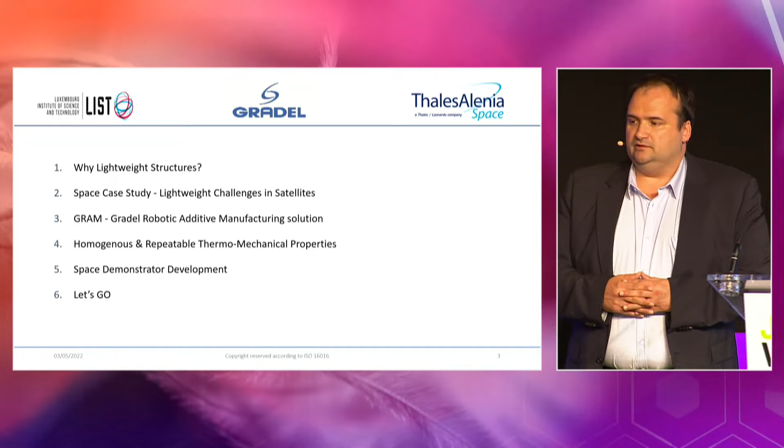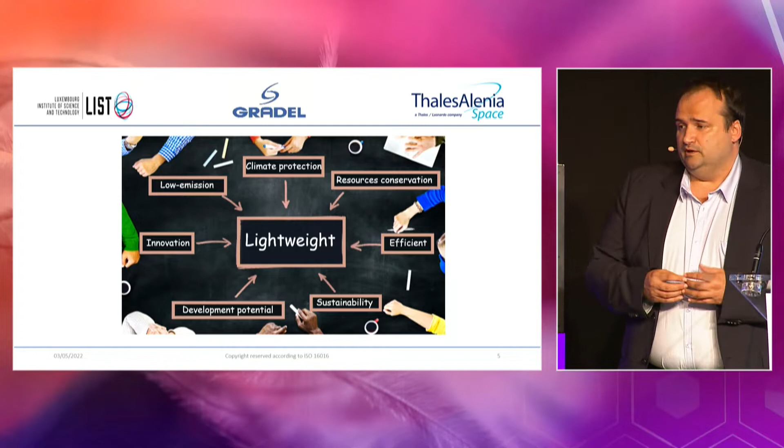Okay, why lightweight structures? In our opinion, we have a big consumption on Earth of natural resources. And if we make our structures lightweight and we use additive manufacturing, we can reduce our footprint, we can reduce our use of material and resources, and we make everything more efficient. And we think this is also the solution to reduce our use of resources.

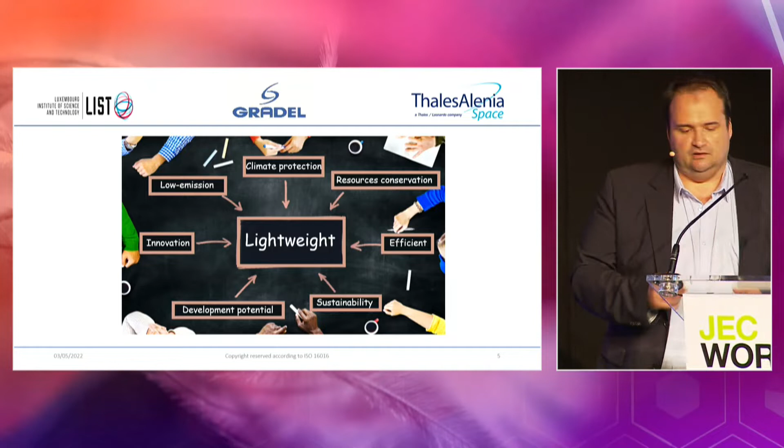I'll let my colleague speak. You hear me? Yes.

So I will just speak to you about the specification of space requirements, because the objective is to qualify this kind of part for space. So just a small word about my company, Thales Alenia Space, which is a main provider of satellite systems from ground to low Earth orbit to geostationary Earth orbit, which is the most important market for us, and up to exploration to the Moon, mainly via the Artemis program, and to Mars exploration.

So, as far as we want to qualify for space, we have to define what is specific to the space environment. This is a very harsh environment, which can be declined in extreme temperature, very cold and very hot, depending on whether the part is exposed to the sun or not. Thermal cycling, because during the Earth orbit, it can go from the sun side to the shadow side, which leads to cold and hot temperatures every time during the life of the satellite. Outgassing is a problem that we have to face, not only for the material, but for the redeposition on other parts of the satellite.

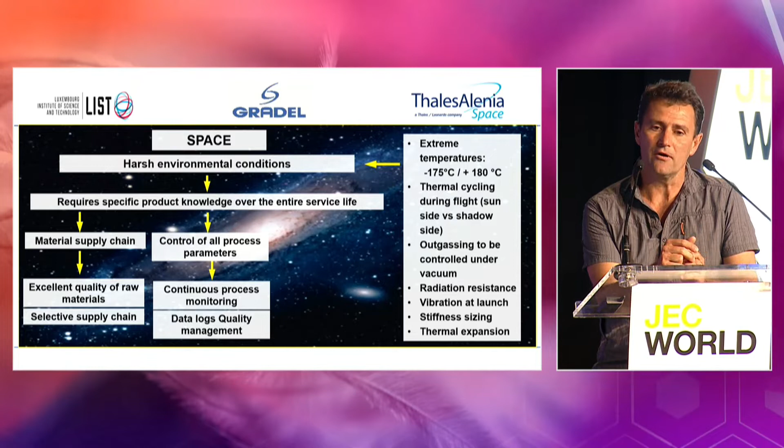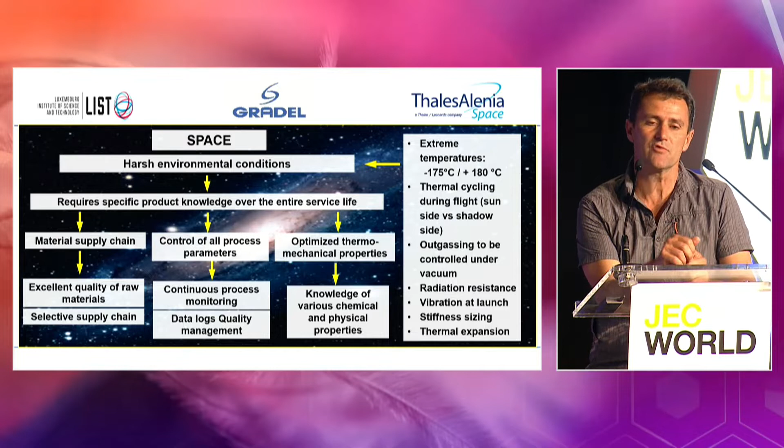It implies as well controlling all the process parameters, which induces a very restrictive qualification method, and it passes through continuous process monitoring and the storage of quality control data. And at the end, for technical parts, we are obliged to work with optimized thermomechanical properties in our materials, and thus we have to work with a high quality database, huge in terms of elements.

So just to come back to the problem of mass, why it is so important in space. I imagine you've got the answer. This is due to the launch, because in orbit there's no load, or almost no load. So most of the work of a mechanical engineer consists in working on the, let's say, 8 to 10 minutes of launch of the satellite.

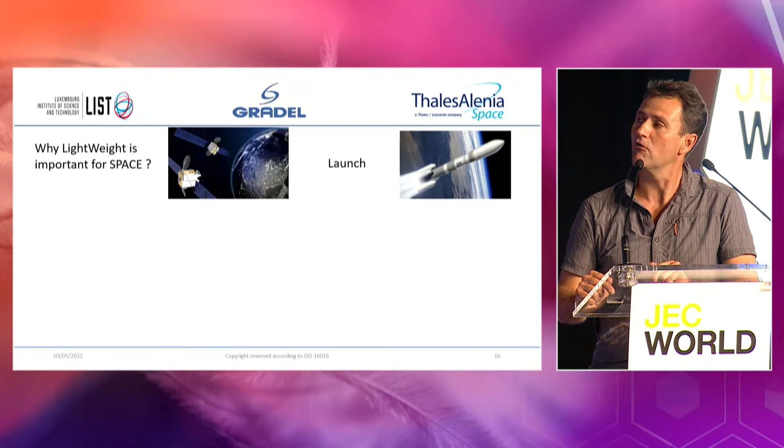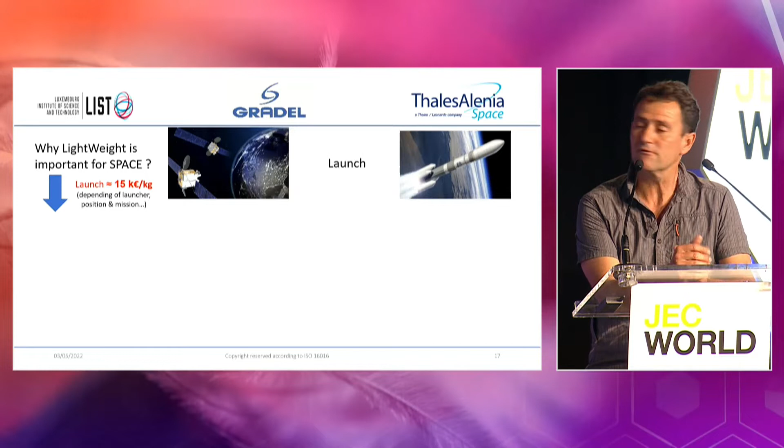When we want to quantify the implication of such a mass during launch, we are used to applying a ratio of 15 kilo-euros per kilo. It depends on the launcher, on the position of the satellite on the launcher, and the mission itself. You can imagine that when you've got a satellite with many tons, it implies a lot of money. That's why we are always working on mass saving in satellite design. This is not the only thing, because now that launcher capacities have increased, it is possible to optimize the cost.

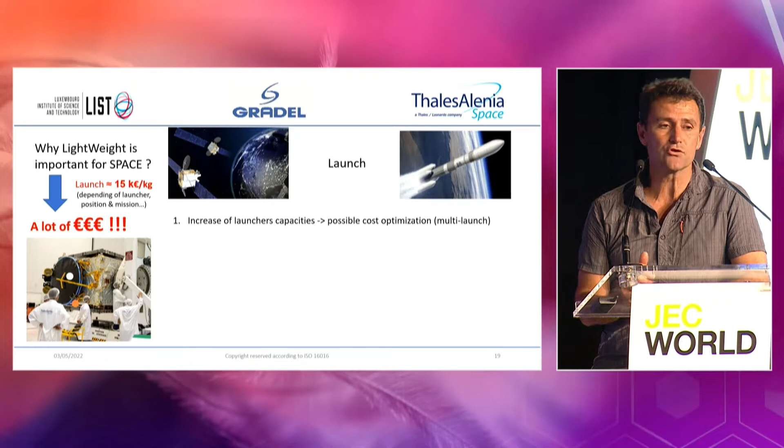Indeed, when you've got a mass saving, you can launch many satellites in only one launch, for example, when the launcher is able to. The other point is what we call snowball effects: mass generates mass.

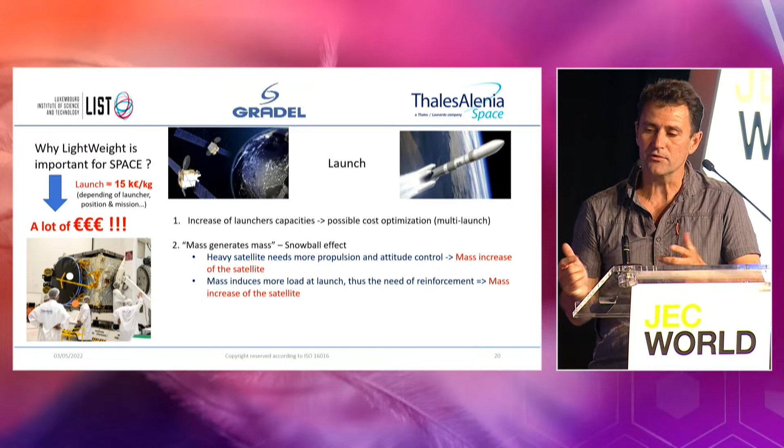Because you can imagine that a heavier satellite needs more propulsion and more systems to control attitude, so that it increases mass. In the same way, the mass induces more load at launch because of the weight, so the structure needs more reinforcement. So that's a very bad loop, because the mass induces mass.

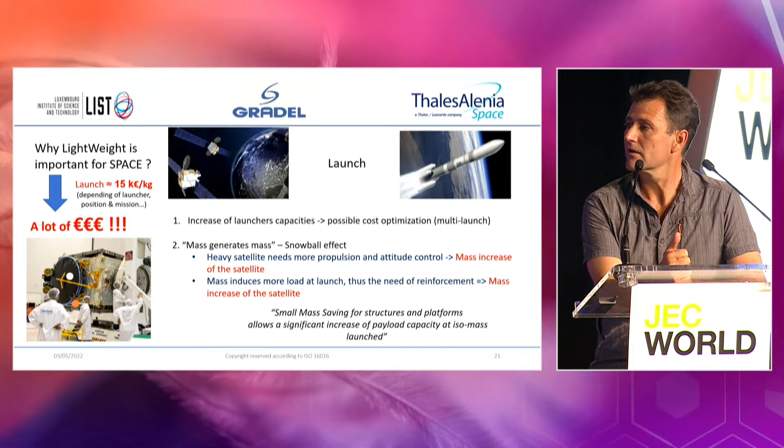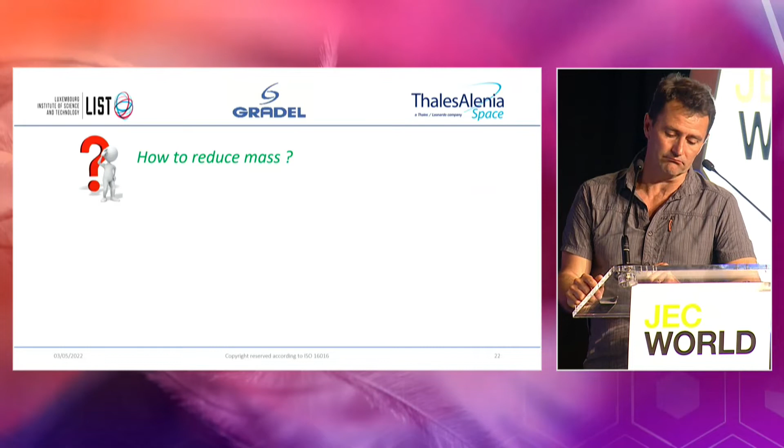To synthesize, a small mass saving for structures and platform allows a significant increase of payload capacity, obviously at iso-mass launched. So now that we have taken a picture of the mass problem, how to reduce this? Most of you know that one way is to optimize the structure.

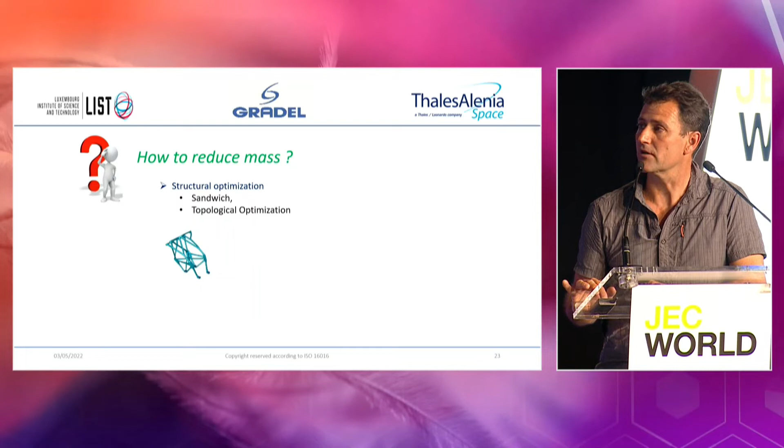That's the case for the sandwich design, for example, where the core is very light, keeping the flexural stiffness. Or the topological optimization for metallic parts, for example. That is the case in many parts. The other way is to optimize the material properties. Often we choose materials with high specific stiffness, and carbon is one of these examples, with CFRP, to reduce this mass.

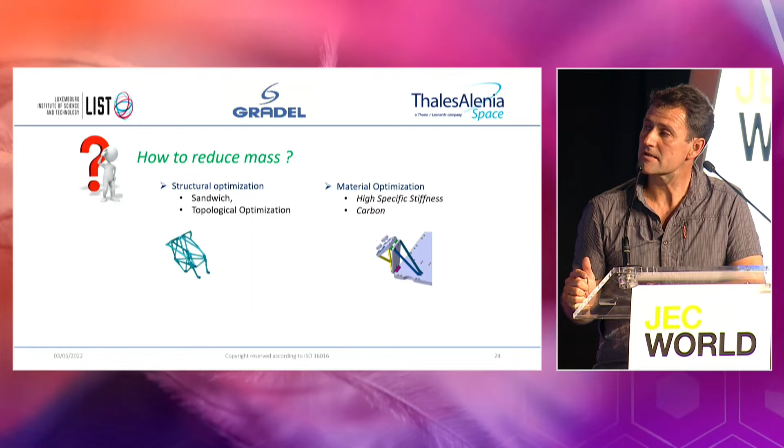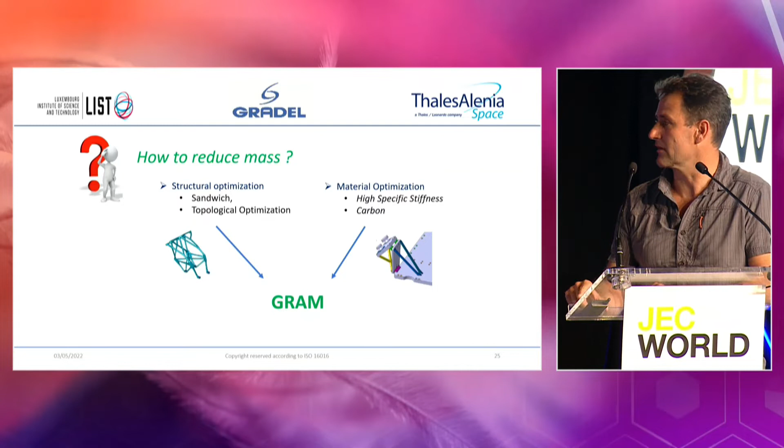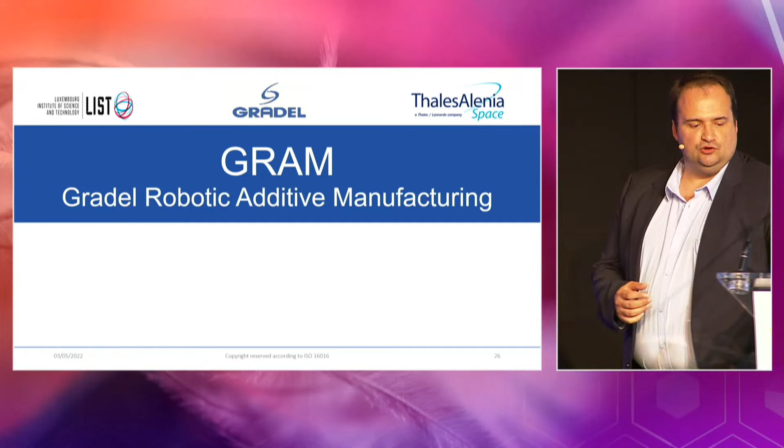We have these two solutions, and now I will let David present his solution, which is GRAM, a common solution between structural optimization and material optimization. You will see it's very promising. Yes. Thank you, Gilles. GRAM is Gradel Robotic Additive Manufacturing, which we developed in-house. And I will present you the advantages and disadvantages of such a machine.

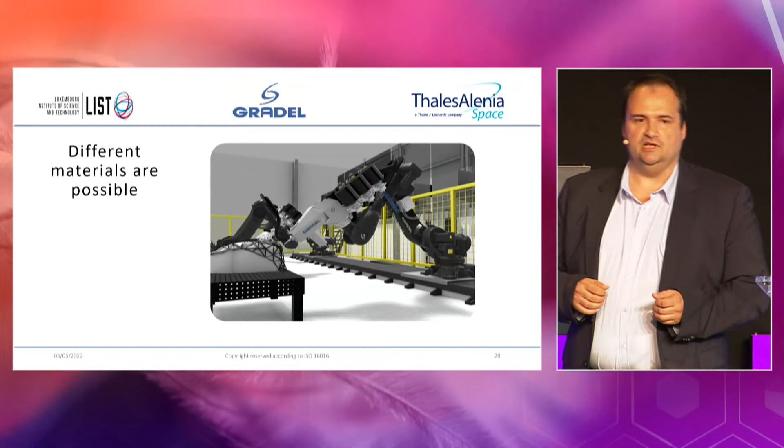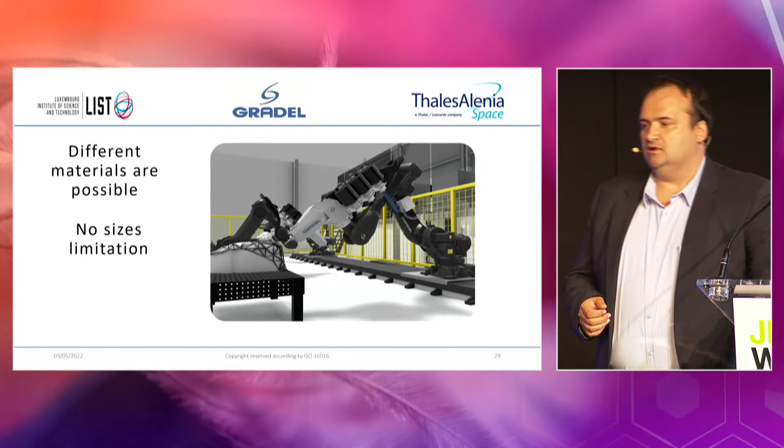It is mainly a robot, with the impregnation head, and the way of winding the filaments and the impregnation is everything in the head of the robot. We use industrial robots, and this gives us the advantage that we can use different materials. We have no size limit. For us, it's more difficult to make small parts than bigger parts, and we can make complex, high-resistant shapes.

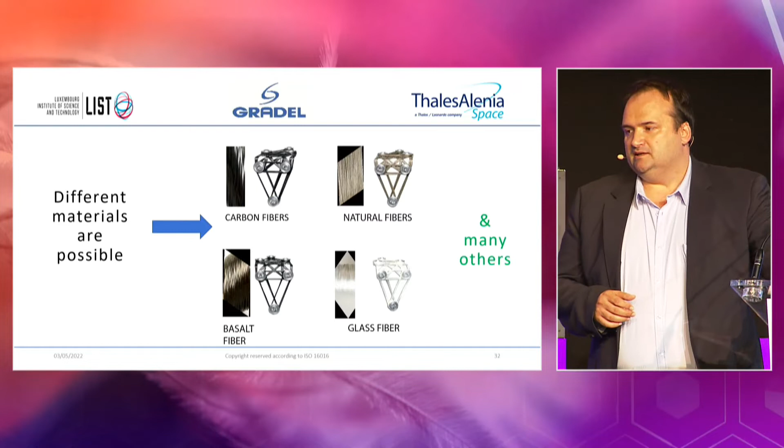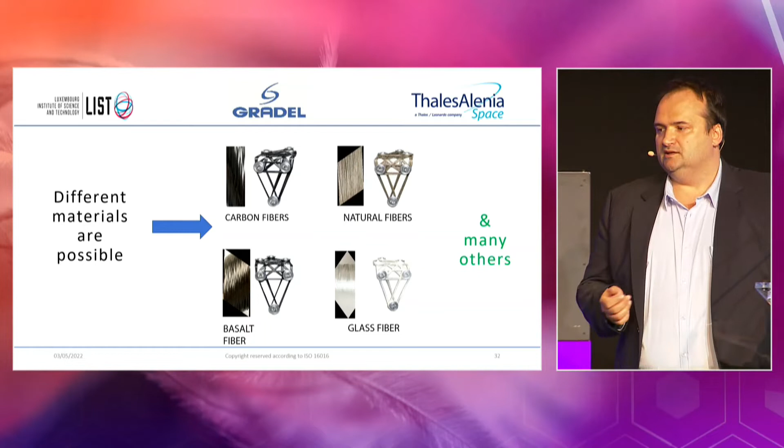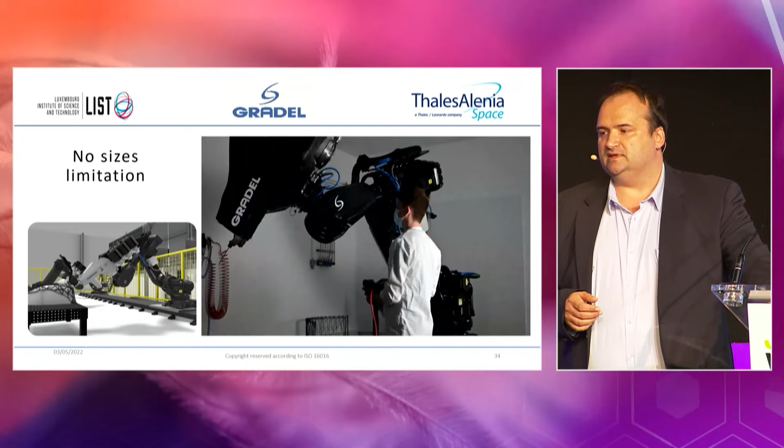Concerning the materials, we already tested carbon fibers, natural fibers, basalt fibers, glass fibers, and we can test many other fibers and resins. It means that if today you have resins and fibers, we can calibrate your material to be used in GRADEL. Here is a small picture of the GRADEL winding, and as I was saying, no size limitation. It will be more the limitation of your facility and of your oven if you need to cure your resins.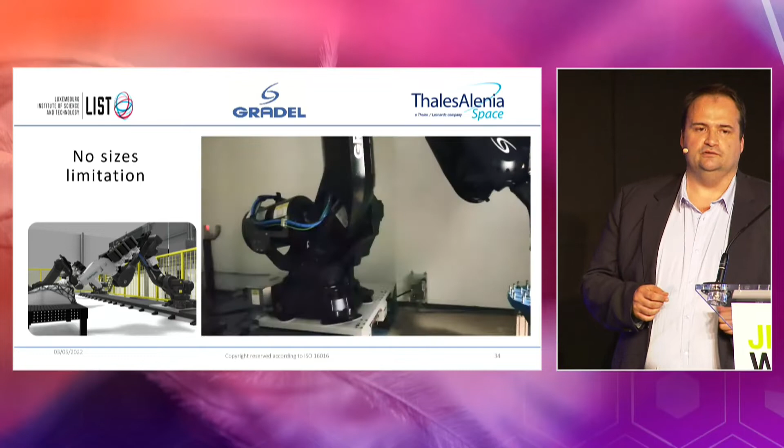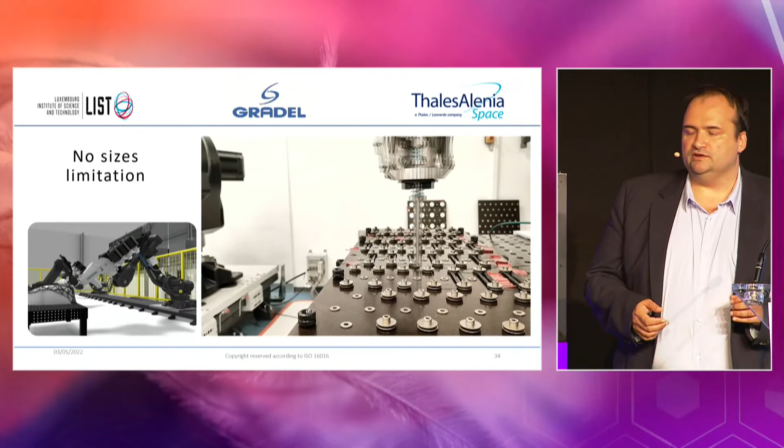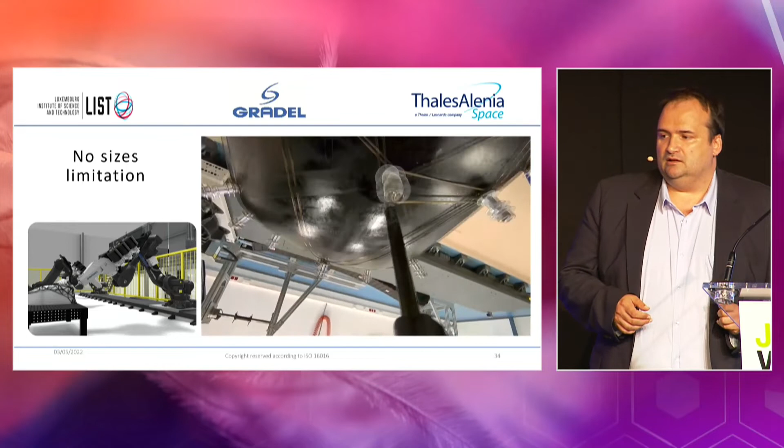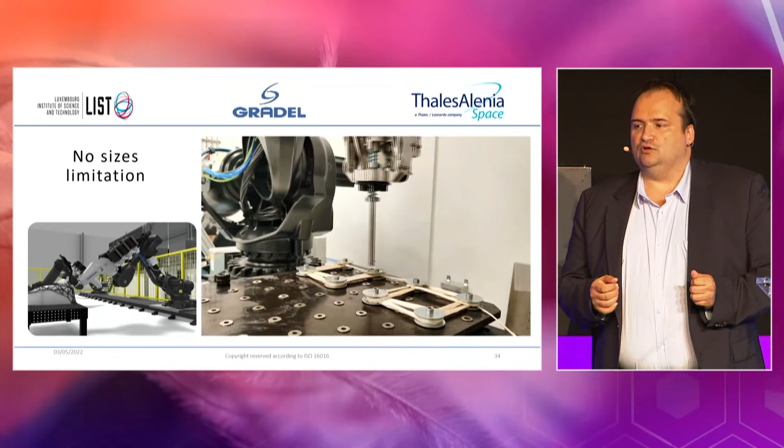With Gradel, the advantage is that we have everything mounted on the robotic head, and this robotic head can be uncoupled and coupled. You have no loss of production time, and you can always keep your production running. Then it's possible to make 3D geometries. You can also adapt and make assemblies of current parts which you are screwing and putting threads. You can make it at once. You will reduce the sub-assemblies, which will give you more time.

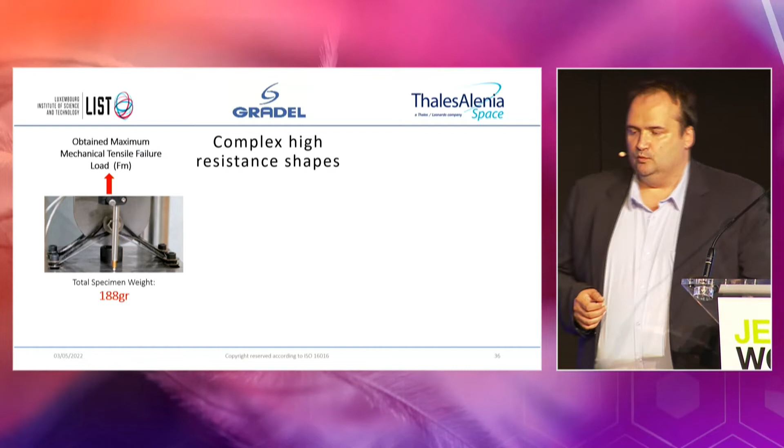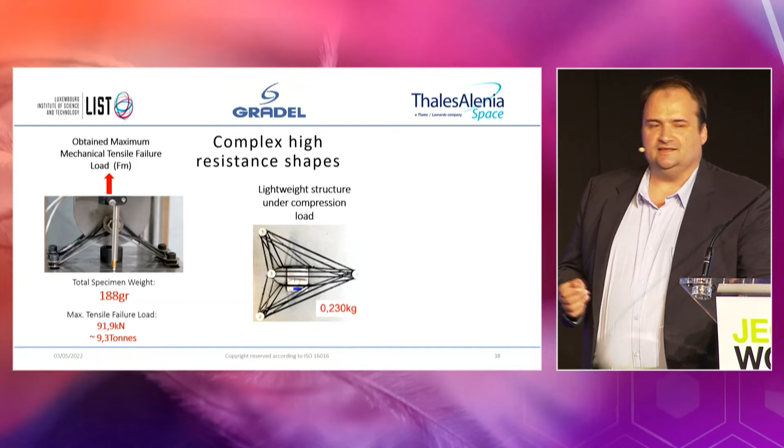Complex, high-resistant shapes. We made, for example, a part which weighs 188 grams, and we reached 9.3 tons. And also for people who think that in compression it will not hold, here is an example, 230 grams, and we put it with all our courage on top of the balance, and we have 103 kilos.

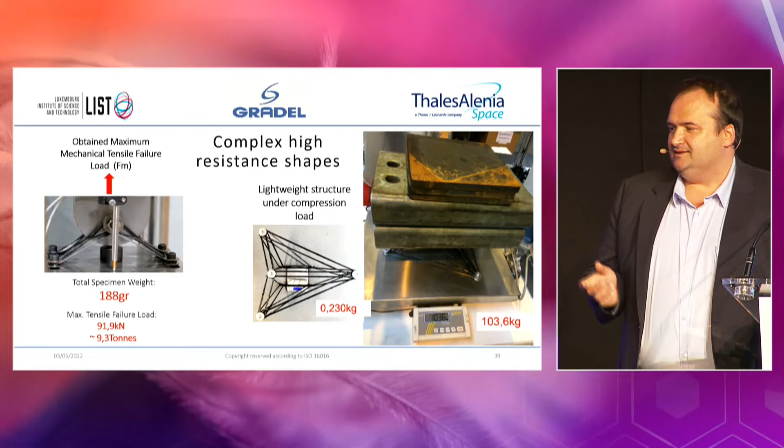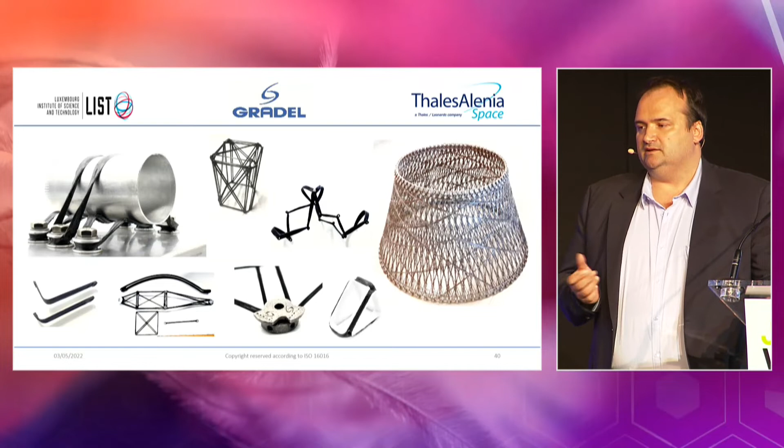Then I show you some parts which were made. You can also make intelligent, functional parts, which can avoid stress concentrations. It can dilate according to your pressure in a tube, for example. You can also combine and equip some materials which you don't have currently.

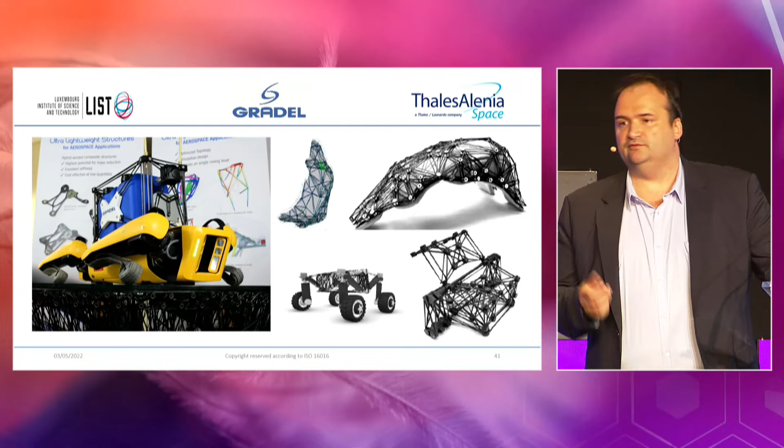It has different applications. Concerning the homogeneity and the repeatability of thermomechanical properties, we qualified our impregnation system with LIST, which is the Luxembourg Institute of Science and Technology. And we made a lot of impregnation tests. We checked all the roving over different meters, and we reached really good quality of impregnation. Currently, we are able to calibrate it at 60-40 or 50-50.

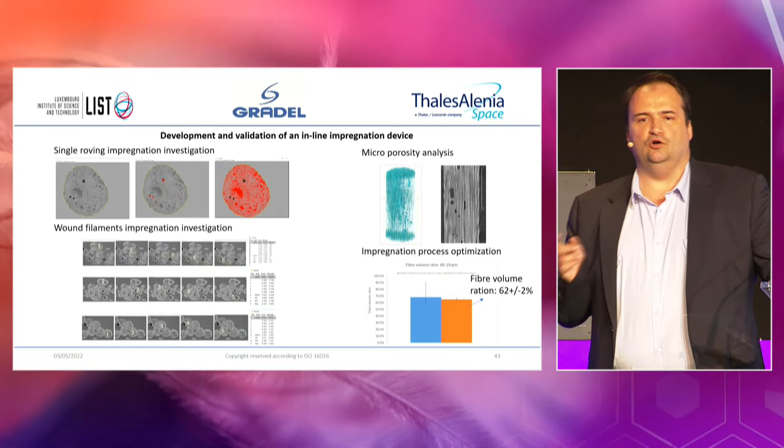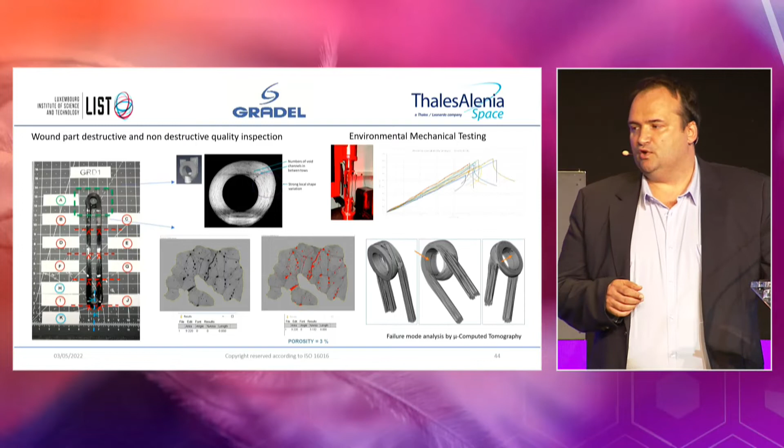Then we also made test specimens and cut different areas to see if the porosity is kept. We analyzed under temperature: ambient, negative temperature, and high temperature. And we have really good repeatability and consistent results. Then I will let you continue.

Okay, so let's go to the demonstrator. It has been developed in the frame of an ESA program, with GRADEL and LIST. And the objective for us was to design a new part. So we have chosen a part, a little bit small, which is a TMTC antenna support.

TMTC for telemeasurement, telecontrol. It allows to ensure the communication between Earth and the satellite. That's not part of the telecommunication mission, but it's a way to communicate with the satellite. So it's quite a critical part, because you can lose the mission if you lose the antenna communication.

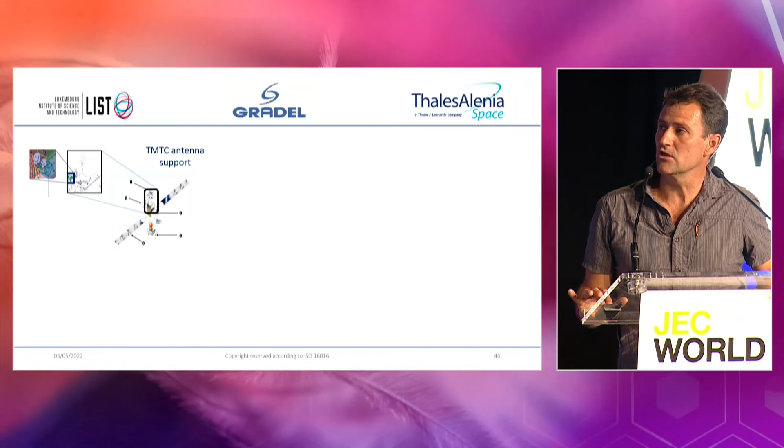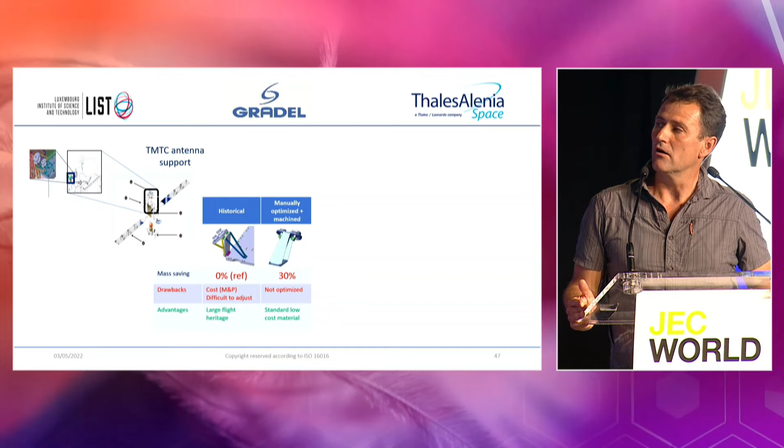In the history, we had this support made of complex assembly, let's say, with panel composite, brackets, and so on, which were bonded, screwed, and it has a significant mass. This is the reference for us in order to save mass in implementing new technology. One simple optimization was made by a simple machining of a metallic part. This has been done, and it allows us to save about 30% in mass. It's quite good, but it's not sufficient for us.

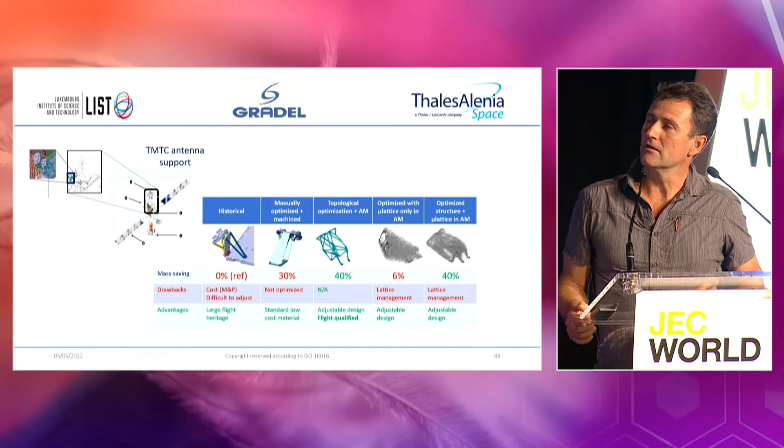So in the last decade, we worked on the topological optimization, taking benefit of the additive manufacturing with metallic parts. And you can see in the middle that we obtain 40% of mass saving compared to the reference. We tried as well to include lattice in such a support, but at the end, on the right of the table, we have the same optimization of mass as a standard topological optimization.

Then we had the proposal of ESA and GRADEL to implement the GRAM system. And the study showed that we obtain a mass saving of 70%. This is very important, and now that's the most mass saving that we can have on this kind of structure. I just wanted to show you the drawbacks and the advantages. The only drawback that we found for the GRAM technology is that it is not yet qualified.

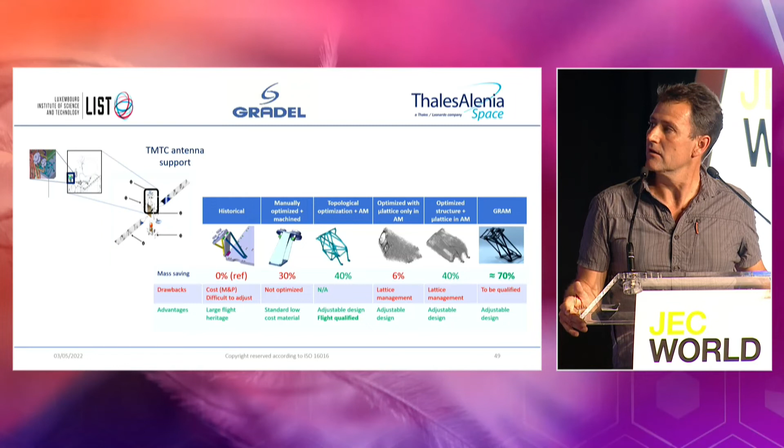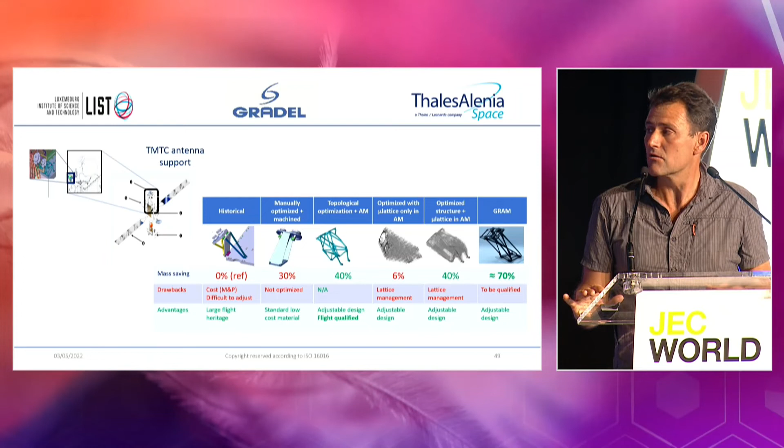So we are qualifying the technology now, so that at the end we will have the lightest structure able to ensure this kind of support. You should be aware that the mass of the structure is very, very low compared to the mass of the antenna that are above. So the structure is less than the equipment. I give you the floor for the description of the support.

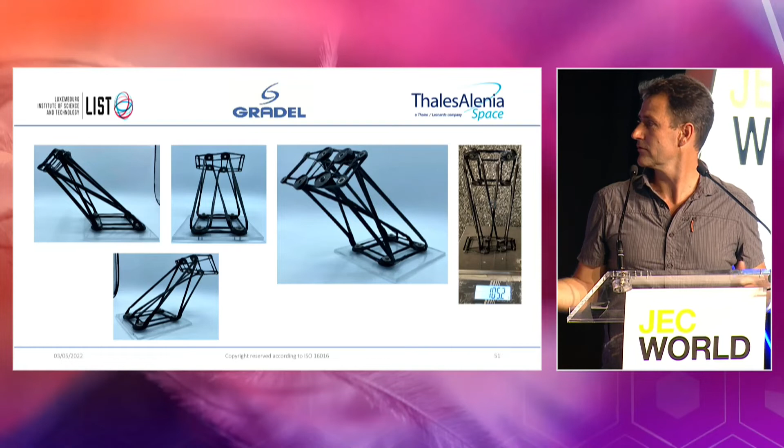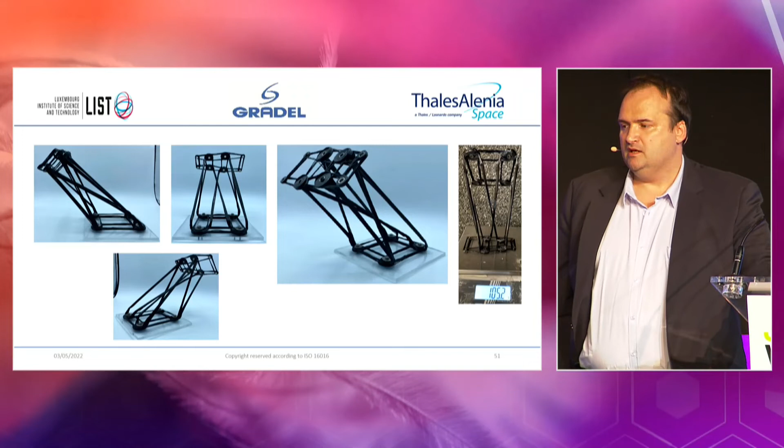How we reach this structure is not only that we make all engineering in-house. We take the input from the customer, and I will let you go through the process, and you will see it's not so easy, because we really need to make a development in-house on how to optimize your structure, reducing weight, so that at the end you have a product which is unique and accepts your requirements.

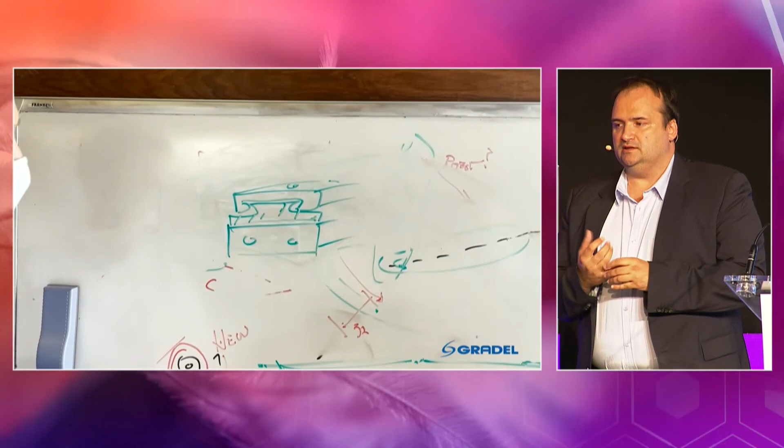Like here, we made a demonstrator on a seat. This seat was made in basalt. We started by engineering, seeing the different deformations. We made some calculations, simulations, and then we came up with a specific structure. Here, with Gradel, it is important for us to know all your load cases, restraints, if you have cables passing, and then after that you have a unique product.

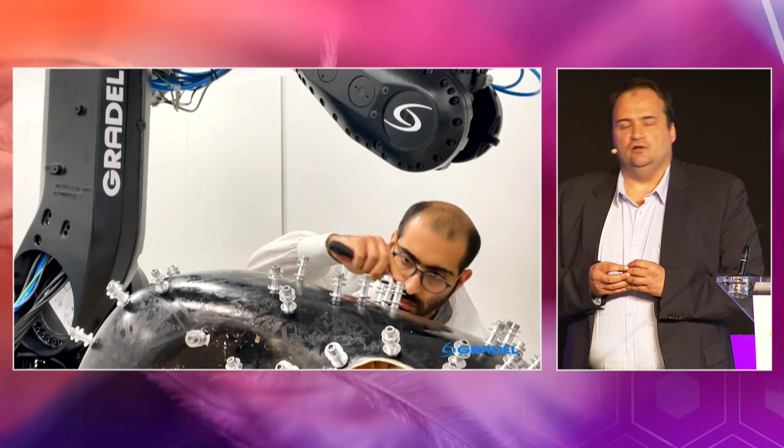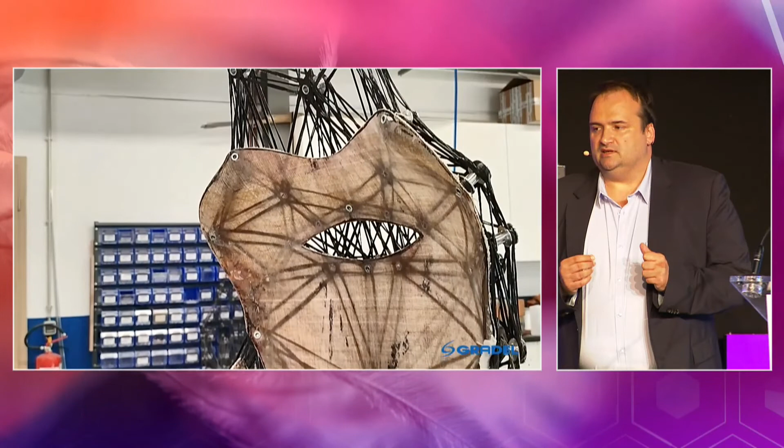Also, our idea is to sell our machines for production, because we don't intend to make production in-house of big quantities. We will make small production, but our idea is to follow the customer in all the steps so that he will have a production line capable of using our robots to produce. And with this seat, we managed to show that we can also use natural fibers. We still have a lot of development to make in this direction, but natural fibers are also a good solution to avoid carbon, or to substitute it in a way which is acceptable.